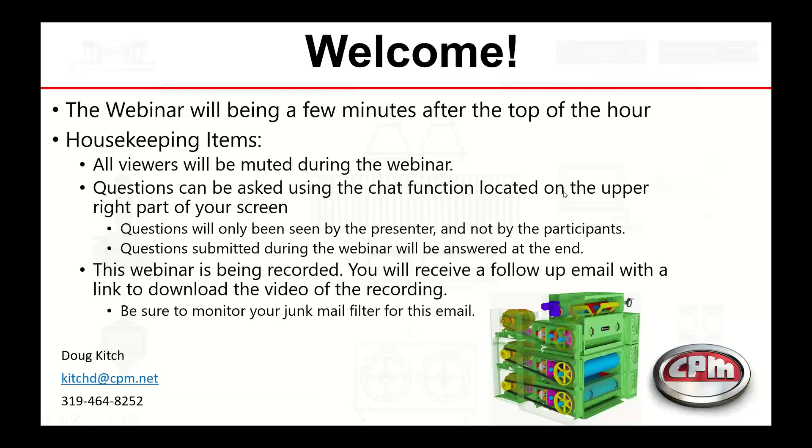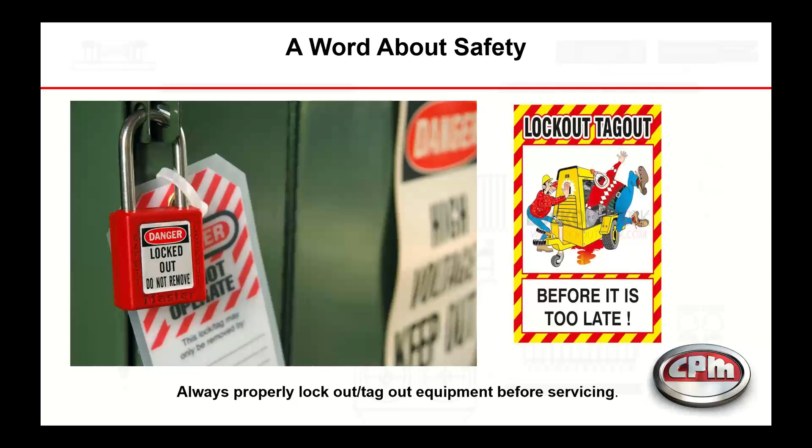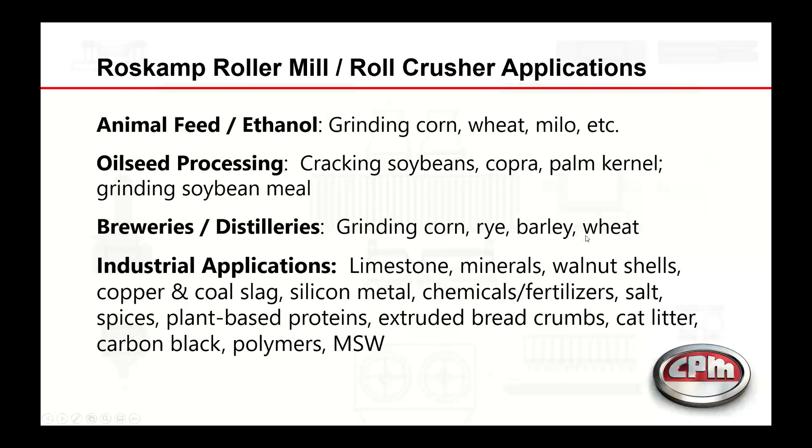Depending on the products you're running - this is a little more focused on the grain side - but usually we see less heating. We're not adding as much heat just because we don't have as much friction working as compared to a hammer mill or a pulverizer or something like that. And again, very application dependent, but because we aren't heating as much, we're also not going to lose as much moisture. So for those of you on the call that are more in the feed industry, that's less shrink that you're looking at there.

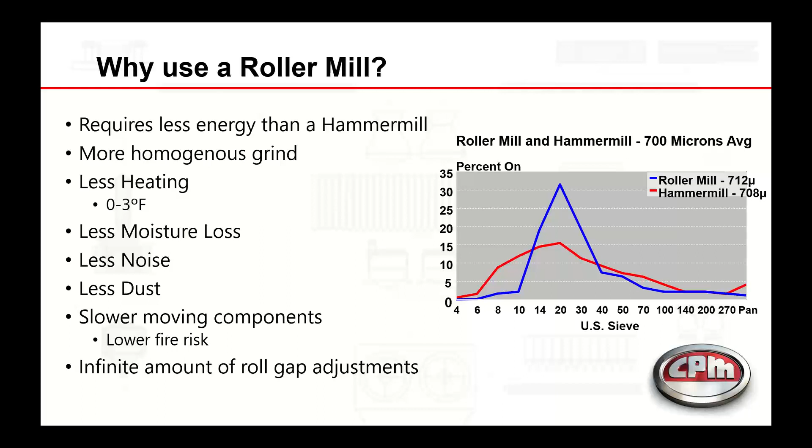So then we've decided that the roller mill is the best option. Now we look at how does a roller mill work? Well, material is fed through a series of rolls, typically 1 to 3 pairs of rolls, in order to try to reduce the size. And that's how roller mills work.

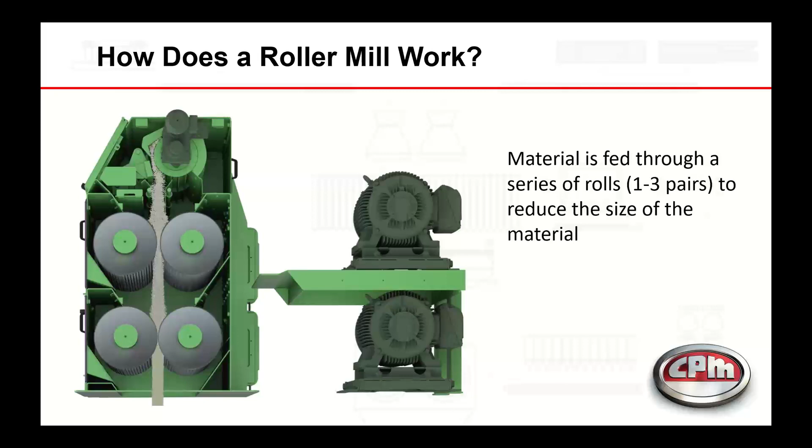I appreciate everyone stopping out today. I'm sorry, that was a poor joke. I apologize.

So let's start at the top of the machine with your feeder and what its function is and the different forms of feeders. This is our pocket feeder. Many of you have this particular feeder, and what this feeder is doing is it's volumetric. So we are able to calculate the amount of volume that we have going through that feeder. You can see the pockets are right here. This is actually showing our high volume feeder. And then it's going to dump across the face of this magnet, which is shown right here, and down into the rolls.

This particular feeder is very nice because it is volumetric. You are able to calculate how much material is going through your machine. And also you can tie it right into the main motor amps, and you can speed up or slow down that feeder as needed, depending on what your motor load is. And it is also a positive shut off, because if you need to turn it off, you can simply turn off the motor and you will not be feeding any product into your machine.

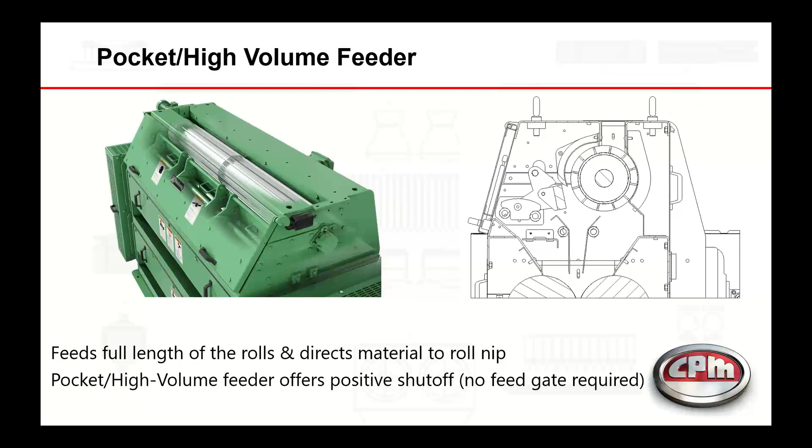So we'll move on next to, oops, too far, into our roll feeder. Now the roll feeder is similar to the pocket feeder in that there's a spinning rotor inside the feeder housing. But this is a very coarsely corrugated roll that you can see right here along this whole length. It runs the full length of the machine. And it utilizes a feed gate that opens and closes to allow more or less product through. So this roll feeder typically stays at a constant speed.

This is a very nice feeder in the fact that it does create a very nice curtain of material that goes down through your rolls. So we see very little surging from a feeder like this. Whereas with a pocket feeder, it's possible that you'll see some surging. You'll see your amps bounce up and down, and I'll touch a little later on why that could cause a little bit of issues. So the roll feeder is very nice in that regard.

However, it does require this feed gate, which does have to adjust open or close depending on what rate you want to be running. Standard, it's going to come with this hand wheel you can see down here. That's going to pivot this arm, which will open or close this feed gate away from the roll to increase or reduce the amount of material that is going through the machine.

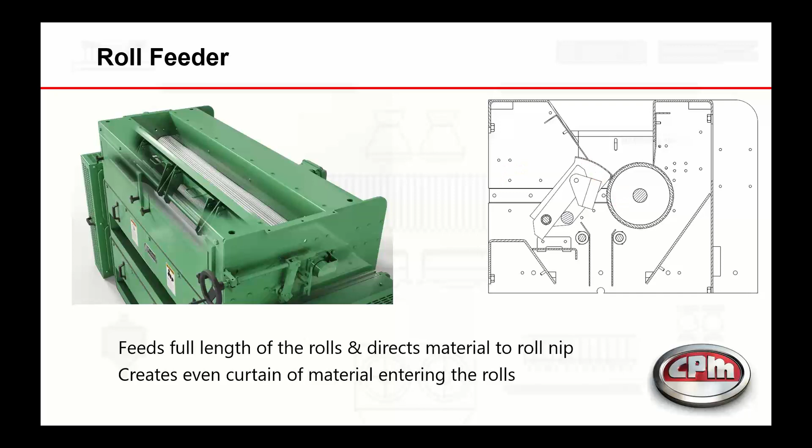Now, if you don't want that manual input, there is an option to add a linear actuator onto that. And this particular option utilizes a 4 to 20 milliamp signal, which you can again tie right into your controls and automation, so you can read your main motor amps to open or close depending on what kind of amp load you're trying to run on your machine. So that way there's a little less human input. You don't have to constantly be adjusting it instead of picking one set point.

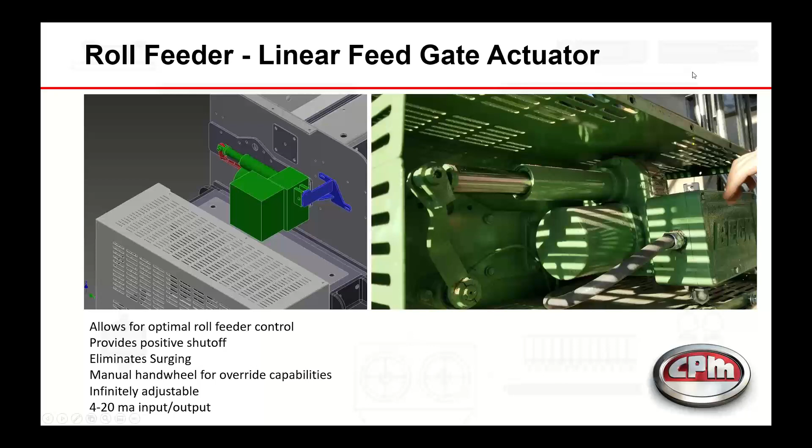Sorry, I have to remove the laser every time I want to change slides.

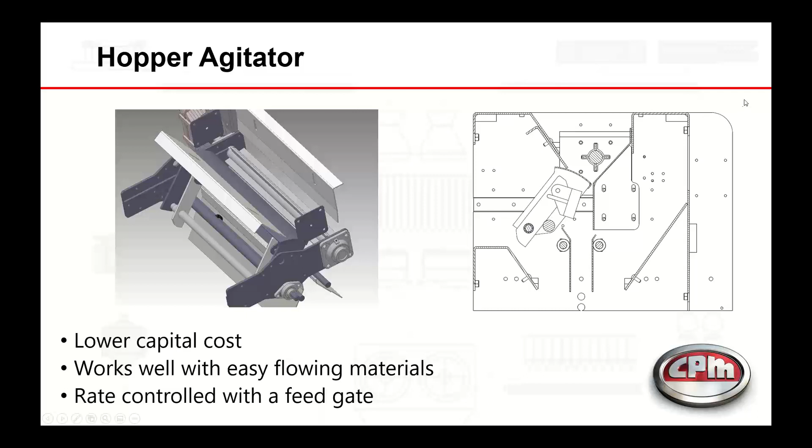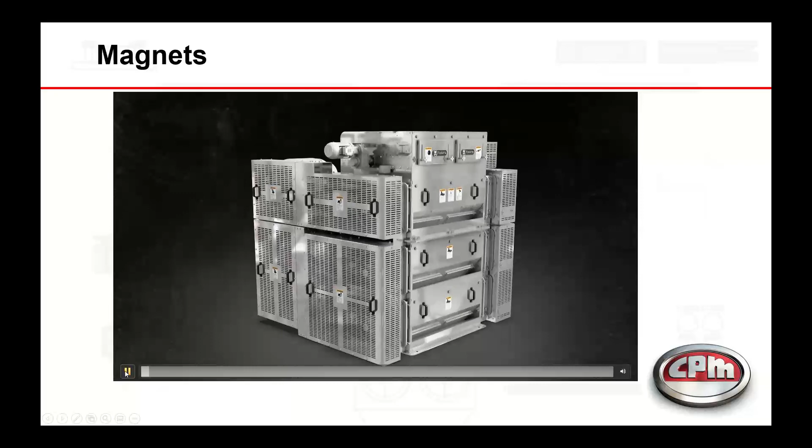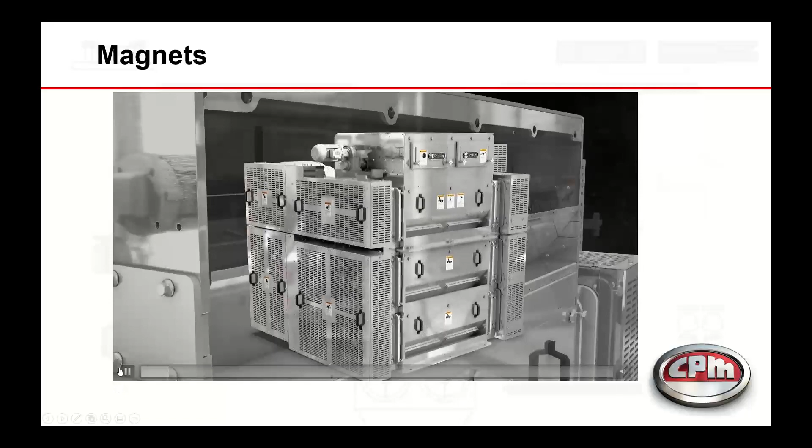Now let's talk about magnets, because hopefully every one of your machines that you're running does have a magnet still installed up within the feeder housing. Just going to play this video. Hopefully you guys all know how these work and you're cleaning them, but you can see that they're swinging away from whatever type of feeder you have in there. I'll play it pretty quick, I'll play it again. I'm going to pause it. So you can see it swings out. Oh, I didn't even get to pause it in time. I apologize.

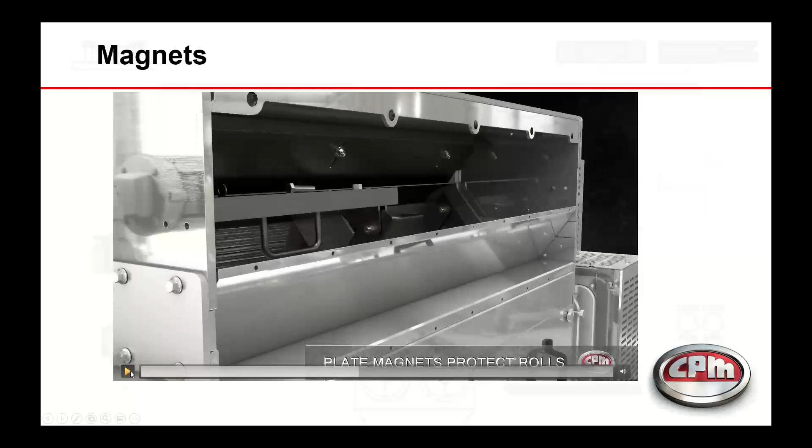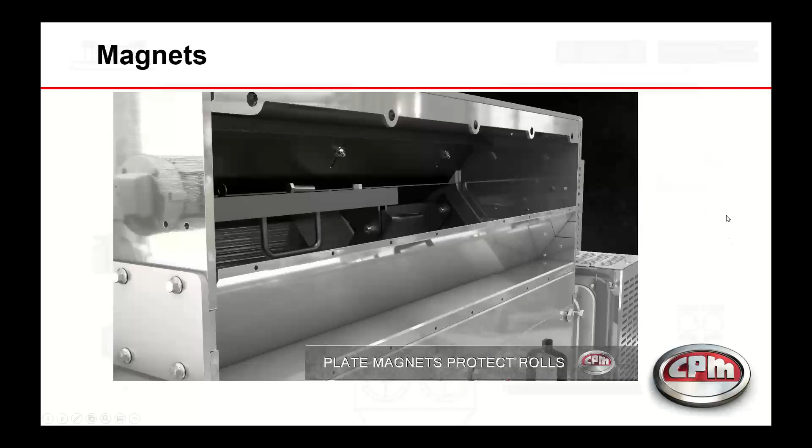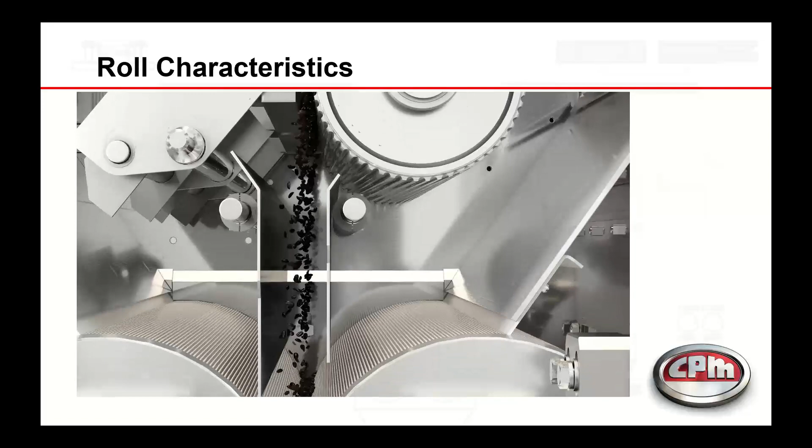So when that feeder swings out, just make sure you guys are cleaning it off frequently. I know sometimes they're overlooked, you forget to do them, but clean these off, making sure you're not getting any tramp material into your rolls and potentially ruining your rolls. So now that we've quickly gone through the feeder, we're just going to go down the line and see where our material goes next, which is into the roll. So let's start talking about some of the roll characteristics.

And first and foremost, we need to start off by trying to decide how many rolls we need to use for your application. As I mentioned earlier, usually it's 1, 2, or even 3 pairs of rolls. And why we need to decide that is, there's a little bit of overlap. There's times where a single pair will do it, or maybe the double pair. Either one will work, but what's best for your application? We have to take into account, obviously, capital cost. There's always that part of the investment we need to talk about. But it's also what's your best operating cost.

And I'm going to bring up the fact that, if you're looking between a 2-roll crusher and a 4-roll crusher, single and double pair, if both will do the job, when we look at the 4-roll as compared to the 2-roll, we're getting additional roll surface area. So we're spreading the work out over more pairs of rolls. So sometimes it's a little easier to get the grind we're looking for, and we can get a more homogeneous grind when we have a little more control over it.

If we look at how many pairs is too many, a lot of your machines out there, we can actually add another set of rolls to them. So if you have a single pair, we can make it a double pair. If it's a double pair, we can turn it into a triple pair, and a lot of times get you a little more efficiency, some better roll life. But as far as is there a limit, we tend to think the 3 pair is the max you should be running, just because as that material is going through your roll crusher, it is getting finer and finer after every single set of rolls it goes through.

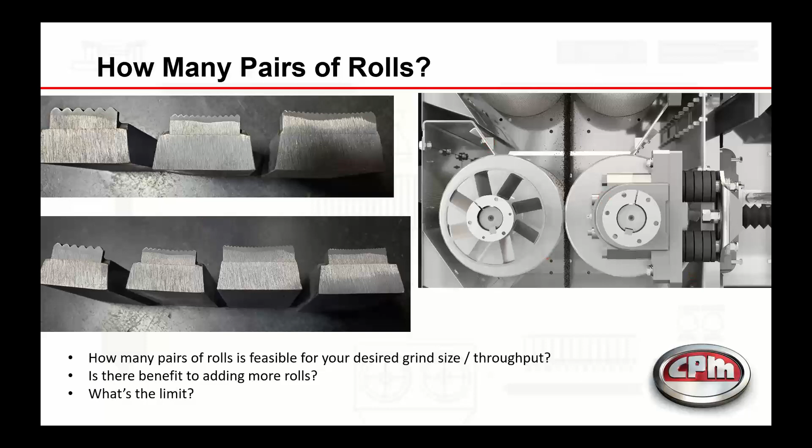There we go. So now let's quickly talk on how all those rolls are driven. In the examples I'm showing here on the far left, you can see we have one of our triple pair roller mills, and you can see 3 main drive motors. Each of those motors is driving the front roll on each machine, or what we call the fast roll. And then over here on the right side is our inter roll drive, or the IRD, as you may have heard.

Actually, let's just go to the example on the bottom. You can see our main motor back here. We have main drive belts going to this front roll, or the fast roll. And then over here on the right side of the machine is our IRD side, which is shown up here in the upper right. So the back roll is driven off the front roll via belts and different size sheaves. And we'll talk in just a second on what these different size sheaves are doing and what they're used for.

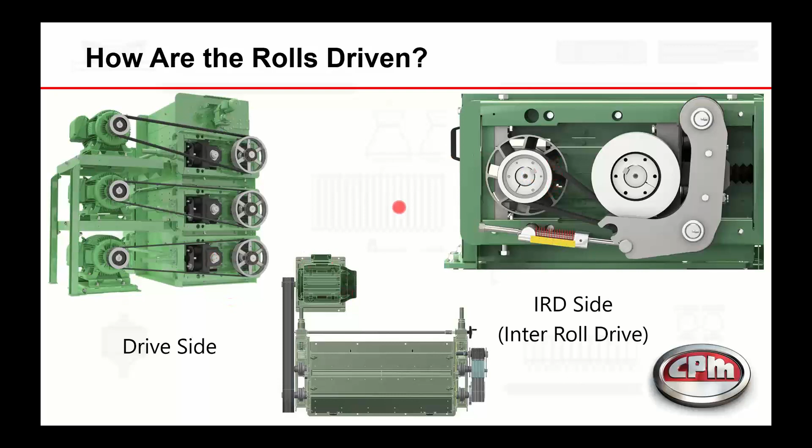So the reason that we like to use one motor per bank of rolls, or sometimes there's 2, but we only drive them off the front rolls, is because we want to make sure we understand how much work we're doing on each set of rolls, because that's really crucial to how your material is going to grind, how uniform of a grind you're getting, and also how much wear you're getting on your rolls as well.

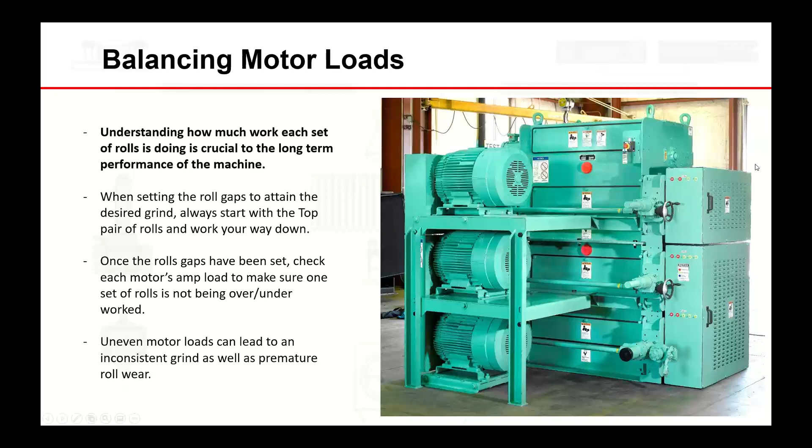And the reason for that is, like I said, it's product uniformity. We don't want to overgrind on one set of rolls as compared to the other. When you overgrind on one pair, you tend to create a lot of fines, more fines than if we were to spread the load out over a couple sets of rolls. And also, when you're overgrinding on one pair, you're going to wear those corrugations a lot faster than the other set of corrugations. And ideally, we'd like to wear those at the same rate.

So it's just for the longevity of your machine. It's a lot better if you can really maintain and balance out the work over all the sets of rolls that you have. Similar to the vehicles you drive, you have 4 tires on them. You want to wear those at the same speed, so you should be driving on all 4 tires.

So to talk about the differential, I mentioned it just a few slides back, and I've actually seen a question has already come in about this. Typically we're going to use a differential on our rolls. What that does is it changes the speeds of the front and the back roll so that they're not spinning at the same speed. And that actually creates a little bit of a shearing action in there. So think of it as you're cutting the material instead of just smashing it together or compressing it.

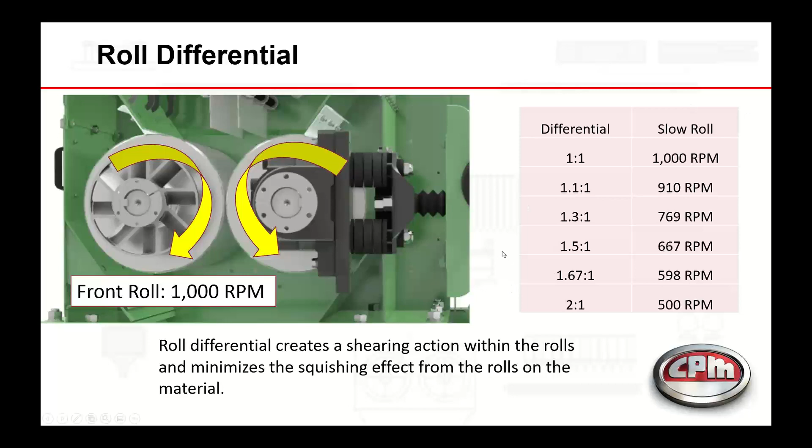Now we just talked about how the rolls are working and the material going through them. These devices, everyone has them on your machines, and I want to make sure we're utilizing them, because without them we have the potential to have material actually going around the rolls. So we want to make sure all the material goes through the rolls.

Up top you can see there's a UHMW cheek plate. It's this piece right here. It's UHMW, and you can see it's slotted, so it's adjustable, because as your rolls wear you will lose diameter, and we want to make sure this contours to the roll. So what this piece is doing is preventing material from going around the ends of the roll.

Now right here you'll see another plate. You can see it on each side. This plate is also adjustable. There's one bolt here, and there's another one you can barely see here, but you can loosen those bolts and this plate will actually slide up and down. What this does as well is prevent material from bouncing over the rolls, because again we want all the material we're grinding to go through the rolls instead of over.

So making sure these are set, I see it quite frequently when I'm out in the field. These were lifted up when you change the rolls, and they never drop back into place. So what happens is you get a lot of material that's going over the rolls. We want to prevent that.

One of the easiest ways I do it is, if you can just use a flathead screwdriver, put it between the rolls and that plate and drop it down. The higher up you are on your machine, it's not as crucial, but certainly as you get down and you're getting finer, you want to have a tighter and tighter clearance on that plate seal.

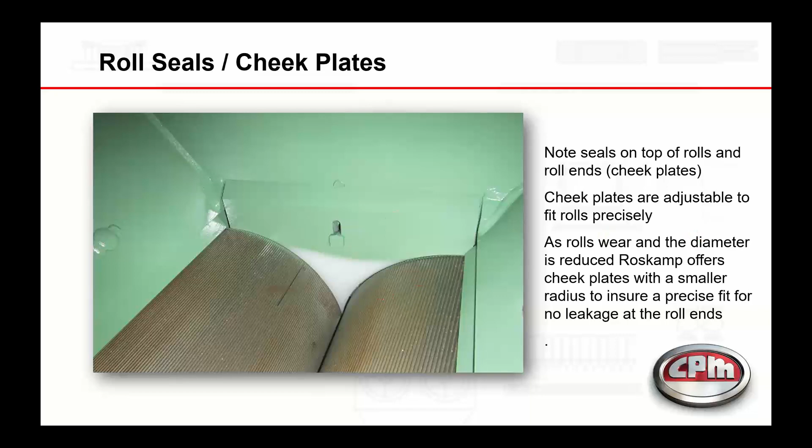Now let's talk a little bit about the roll diameters and what the options are and some of the advantages. For the most part, larger diameter is better — there's more advantages the larger you go. I'm going to talk about three main bullet points. On the left is a list of the different diameters of rolls we have available in particular machines. A couple of these we don't actually offer new anymore, but there's a good chance many of you are still running them in the field today.

The first one is the nip angle, and that is basically what is grabbing that material and pulling it down through the rolls. Yes, the corrugations are grabbing a little bit, but it's also the angle at which that roll is able to contact the material. The larger the roll is, the more optimal that nip angle is.

I use the example shown down there: a Ram truck and a golf cart. If you have to use one or the other to jump over a curb, that truck's going to be able to do it better because it has a larger diameter wheel compared to that golf cart.

Just because I'm sure a couple of you were joking about me using a Ram — I did have a coworker suggest that I use an F-150 here, but I told them I could not. I did not have enough room where that golf cart is sitting, so I couldn't use that as an example.

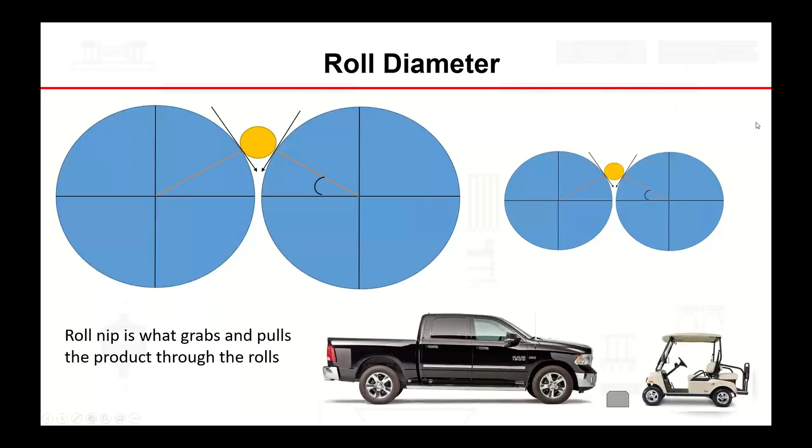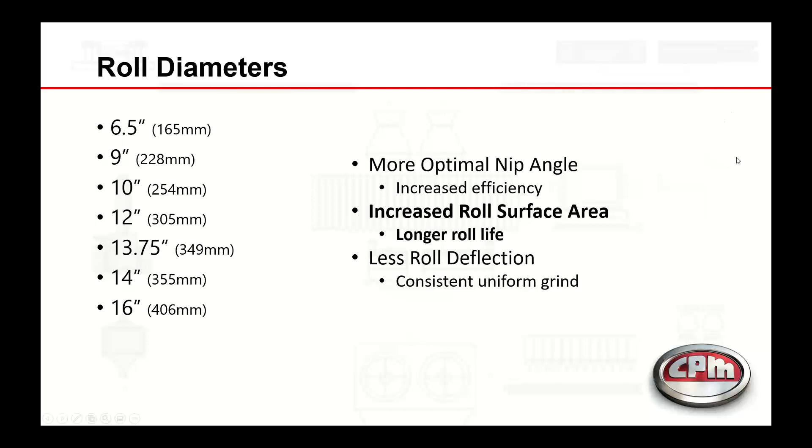So now to talk a little bit about increased surface area. When you go to a larger diameter, you have more surface area on that roll as well, and what that's going to do is give you longer roll life. The corrugations are still wearing at the same rate, but because you have more corrugations, they're going to last longer in between the times you need to corrugate. I give three examples here, showing three different 36-inch wide rolls.

So we have a 9-inch, a 12-inch, and a 16-inch diameter roll. That 9x36 has just over 1,000 square inches of roll area. The 12x36 has about 1,357 square inches, and the 16x36 has just over 1,800 square inches.

So each of those is about a 33% increase as you go up. You have the same width of machine, and theoretically you can move the same amount of volume through that, ignoring the efficiencies with the larger roll diameters. But if you have 33% more roll area, we would expect you to get 33% more life out of those rolls before you need to recorrugate them.

So that leads directly into what's your downtime. If you could remove one less corrugation and one less time you have to turn off that machine and shut your production down, what's that worth to you? So just something to keep in mind when you're looking at machines, and is there a potential there for some savings?

I'll add, some of your machines can be retrofitted. We can convert a 12-inch machine to 13 3/4-inch diameter. And those of you running a 14-inch, we can also increase that to a 16-inch roll utilizing the same frame. There's just a few components we need to change on your sheaves and belts, but there could be a possibility we can increase the diameter of your rolls without changing anything else on your machine.

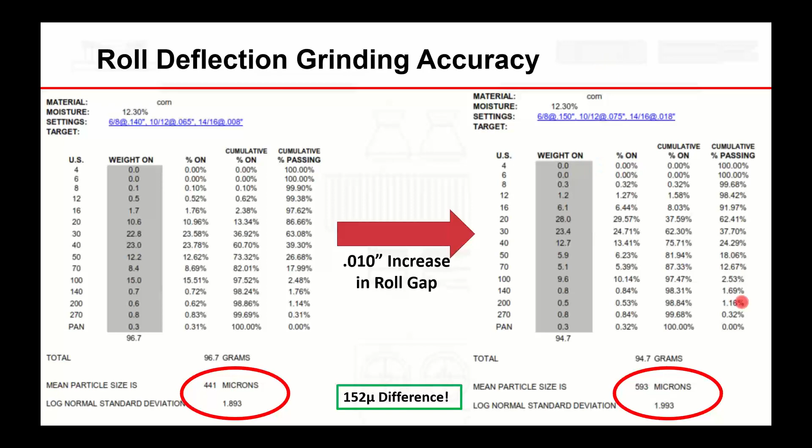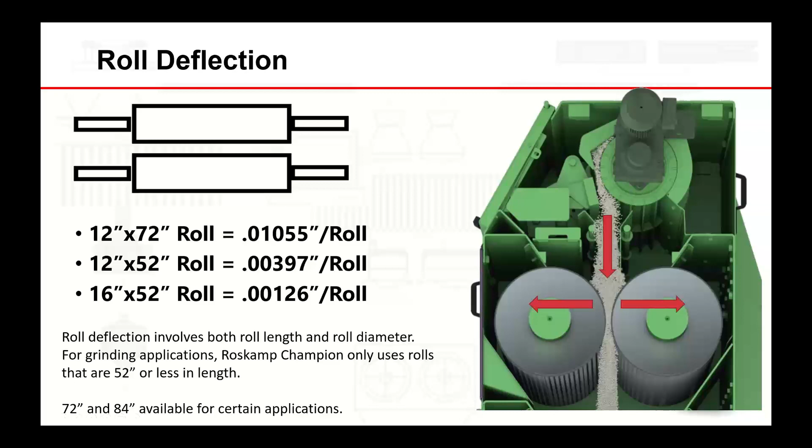Now, if you go back and think about that 152 micron difference - if we have a roll that can flex that much, you could be making a different grind even though your roll gap's the same. As that roll is flexing, you're going to see your grind change. That's why we don't like to use a machine wider than 52 inches for a grinding application, because when you're 52 inches or narrower, that deflection number really drops down, and we're able to keep a much more homogeneous grind for a longer term.

So let's talk about this now - we're obviously trying to keep a homogeneous grind, and we can see some roll deflection and what happens. So how is your machine keeping those rolls together? How are we maintaining that consistent grind?

Just a real quick trivia question, because we can - any guesses on what the weight of a triple pair 1652 roller mill or roll crusher is? And that's not including the motors. You guys are all muted, so you can't answer anyway.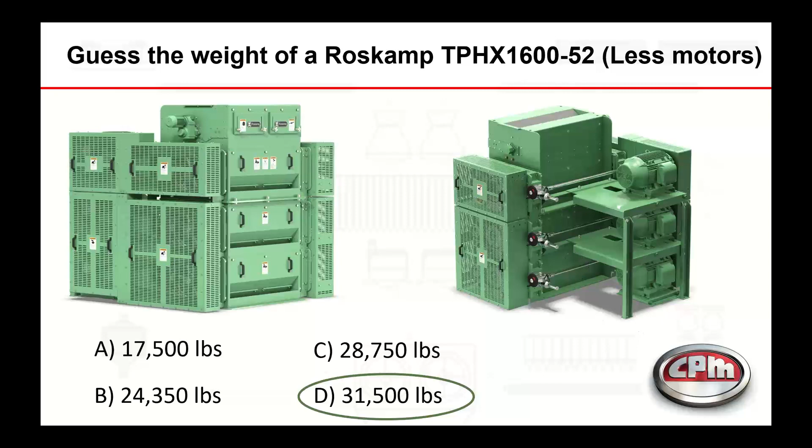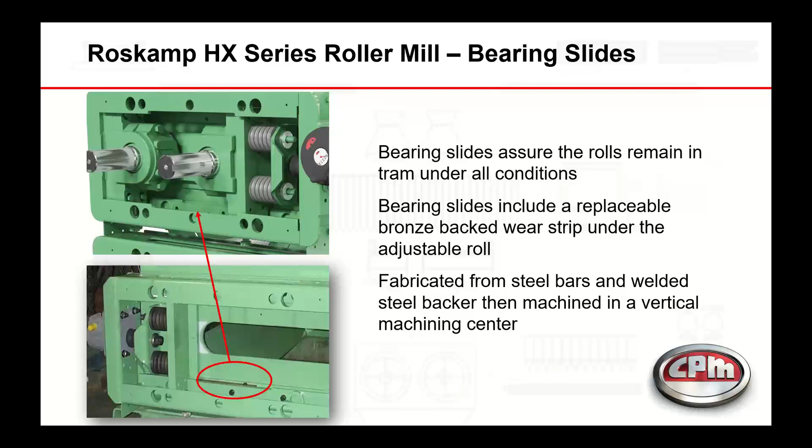Also on that machine, just to point out, the frame is the only piece on your machine that cannot be replaced by the time that would wear out - we just assume you'd need a new machine at that point. There is a piece on the frame that is replaceable though. I just want to point this out real quick - it's that bronze bearing slide. As that slow roll is moving in and out, there's a sliding surface, which is that bronze wear strip. That is replaceable, so that's just what I want to show on this slide.

But the frame only is supporting the weight of the rolls, so we need another enclosure that is holding together the separating forces. As those rolls are trying to push out, we need something to contain that pressure as well. So what you guys have on your machines are these tension members, this whole tension member housing.

The way this particular area works - this machine is showing a 5-ton ball screw jack, which is what's going to move your rolls in and out. It's going to hold your rolls in. You can see our bearings up on this tension member, and then we have this tension member over here that's holding this side. Now on these rolls, you can see we have a disc spring, and on the next slide I'll show you some examples of those.

That's what's going to hold those rolls in. If you do get an uncrushable object—I won't say rocks, because some of you on this call are grinding rocks, but bolts or something like that—if we need to pop those rolls open, that's what those springs will do. But what I wanted to show here is that it's this tension member affixed to your frame that's actually supporting the separating forces when you're grinding.

So we have two different areas on that machine: the frame, which only holds the weight of your rolls, and this tension member enclosure, which is what's actually holding your rolls together to keep them from trying to move apart on us.

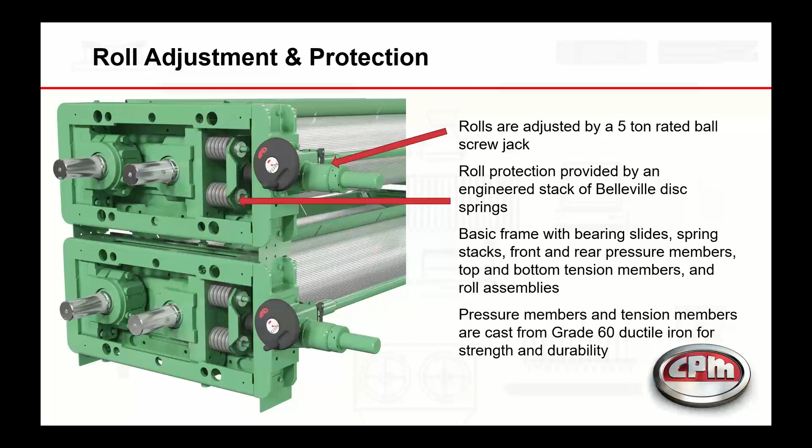So the springs I just talked about, depending on the series of machine you're running, are going to look a little different. You can see up here on the top left, this is our 650 series, a much smaller machine, so we don't have a very high intensity spring going on. But as our machine sizes get bigger, our spring stacks get more and more robust. You get up to the 1200 and 1600 series shown down here on the bottom, and you can see there's a double stack of Belleville disc springs we're using there.

Just like I said, if an uncrushable object does come into your machine—hopefully it doesn't—that will allow those rolls to pop open and hopefully allow that product to get through.

There are a few different options we use when looking at these spring stacks, and it depends on your application. Like I said, there are people on here grinding rocks, and there are some people grinding very simple stuff, such as corn or other grains.

So we'll put a preload on those springs—that's what's holding those rolls together. We also have different deflection forces and over-travel to look at, so we can move anywhere from 4/10 of an inch up to a little over an inch, depending on your application. I'm going to keep it a little vague here since we have such a wide array of people on the call today.

Basically, what I'm getting at is there are different options depending on what you're looking at. If your grind changes and you're starting to get a much finer grind, we want to make sure we're keeping those rolls as tight as possible, so we may look at an alternative spring stack to keep those rolls from moving as much as possible.

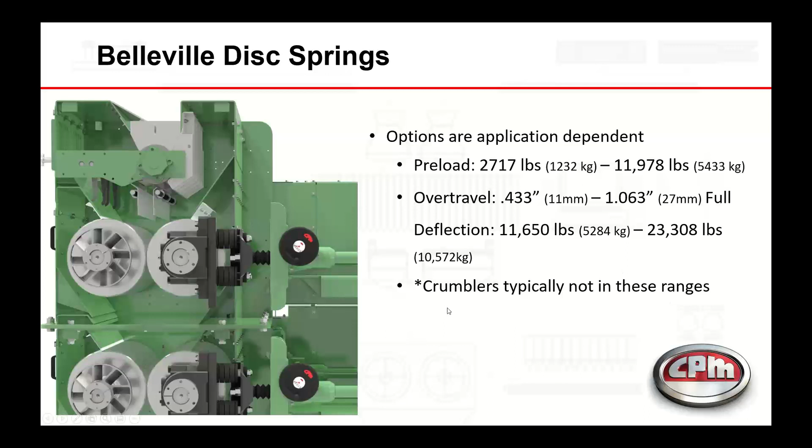Now we're going to move on to the roll adjust. We just talked about how we want to try to keep those rolls from moving—we want to keep them in the same place. Once we get them where we want them, we want to make sure we can move them in unison. So we have the single point roll adjust: you only have to move one hand wheel per bank of rolls, and that roll will stay together and move in unison on both sides.

Because once we get parallel, we want to keep parallel, especially as you get to a wider and wider machine, keeping that parallel can become very difficult. That example I gave earlier on our 12 by 12 machine—that's not very hard to keep parallel because it's so narrow. But as you get to that 52, 72, 84, it becomes more and more imperative to keep an eye on them.

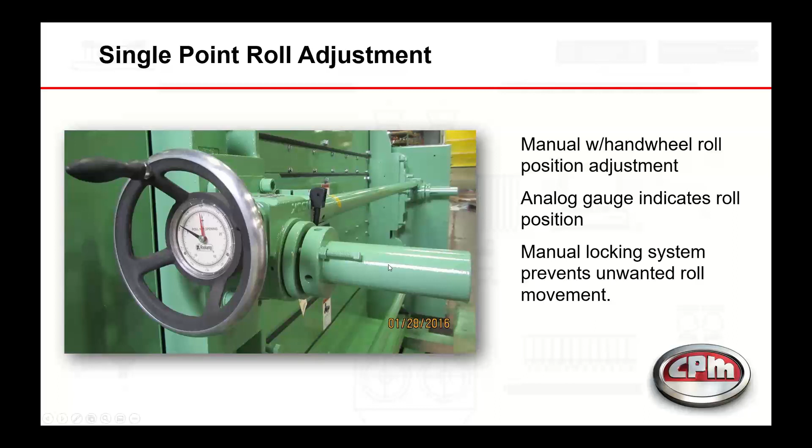So we have the single point roll adjust, but as you're checking it, you may notice your rolls aren't in parallel. Luckily, we have a very simple way to correct that. If you're on our 1200 or 1600 series, there's this coupling on the back connecting those jacks together—hopefully you're all familiar with it. All you have to do is slide this coupling over, and you can move either side independently to get the rolls into a parallel position.

And you reconnect that coupling, and you can continue to move that roll as you were before. For those of you operating our 900 or 650, as you're aware, it's not that simple. I apologize, I actually omitted those slides from here, but you can certainly still do it. You have those threaded rods on each side, but for the 1200 and 1600 series, this is how we maintain our parallel.

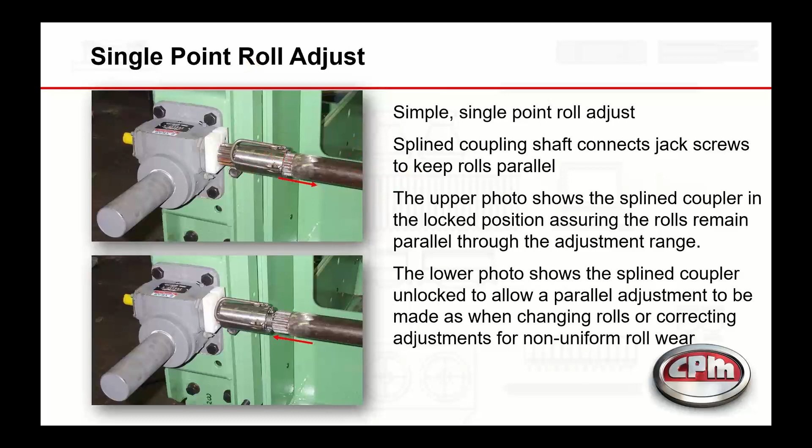Now, all of your machines do have roll stops, which is what we use to prevent you from running your rolls together. Unfortunately, when you have to have a very tight clearance, if we're down to 2 to 3 thousandths of an inch, there's also the possibility they can run the rolls together. We don't want you to do that, because that's going to wear your corrugations faster and increase your operating costs, which we don't want to do. So these roll stops are designed so we can set them to prevent your rolls from running together.

Again, I'm showing our 1200 and 1600 series here. The 900s and 650s are a little different. Certainly be happy to always work with you guys and walk you through how to set them. Each application we're going to set them a little differently. So if this is something you're not familiar with, please feel free to reach out, and we're happy to walk you through it. I don't want to wear your rolls any faster than we have to, so making sure these are set is a very easy thing to do, especially if we're on site with you guys.

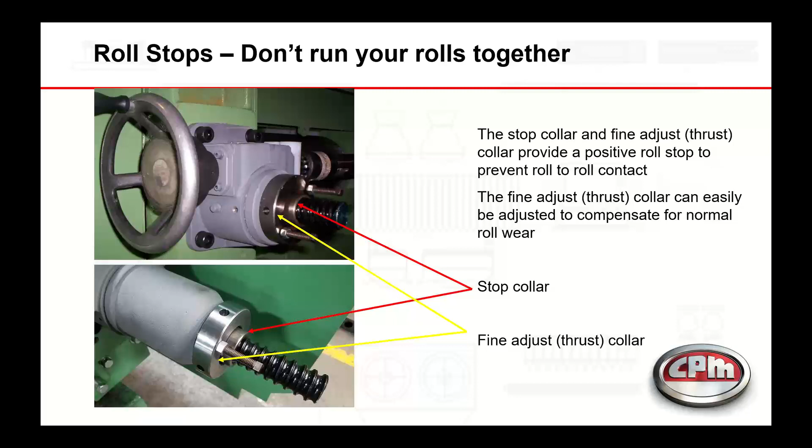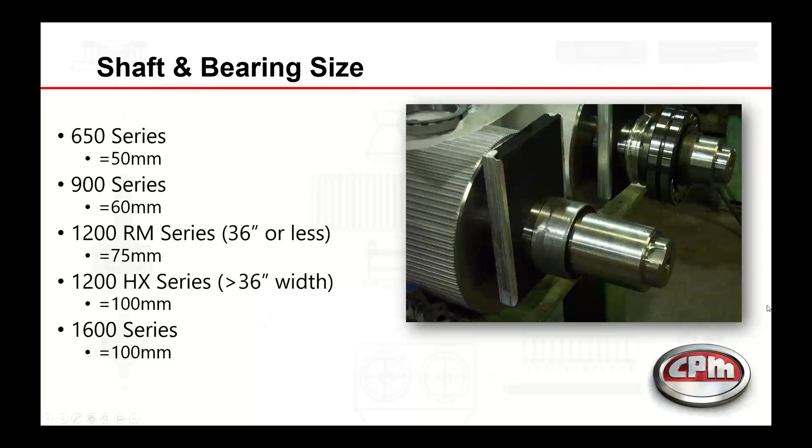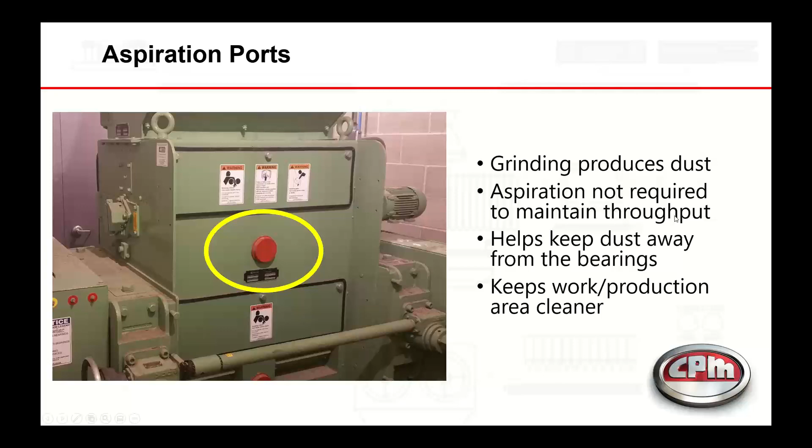Now, all of your machines did come standard with an aspiration port on them. Many of you that have older machines, if you haven't purchased your machine within the last 5 years, your aspiration port's going to look like this - that round, I think it's a 4-inch diameter connection point on the back of your machines. We don't require aspiration to maintain throughput through your machine, kind of like a hammer mill would, but we do like that just for housekeeping purposes, and even to help protect your bearings a little bit. I'll talk about that in a couple slides.

But the newer machines that you'll see out there actually do have a full width air pickup point. We did that to help keep the velocity a little lower, because with that round 4-inch diameter one, depending on how much aspiration you were pulling, you got a pretty high velocity at that pickup point, and we'd pull a little more good product than we wanted to. So we want this full width pickup point. Sorry, I realized my laser's not on - here we go. So we do have one for each bank of rolls.

So you can be pulling a lot of aspiration here from the bottom, but you won't be able to collect any of the dust that you're actually producing up on the top of the machine. So if you do want to put a little negative air on it, I do strongly encourage that you put them on every bank of roll, just because that's where you're producing the dust. That's where we're going to try to collect the dust.

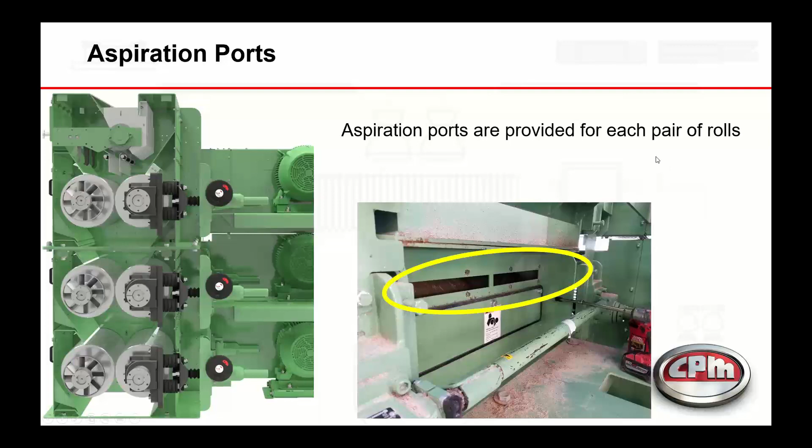So the places that dust could get out through the machine would be where your roll shafts are exiting the machine. So we do have roll seals that you can see here mounted to the shafts. That's just a neoprene seal that's going to hold tight against the frame of your machine to help prevent dust from getting out.

Then we get into the split housing pillow block bearings we use. We now make them with an LOR seal to get that O-ring in there. The goal is just to try to prevent as much dust as possible from getting into those bearings. Those bearings are designed to last the life of your roll.

So if you're not seeing that or having issues, an easy way to potentially increase bearing life would be to put a little bit of negative air on that machine, just to try to prevent a little more dust from getting into those bearings.

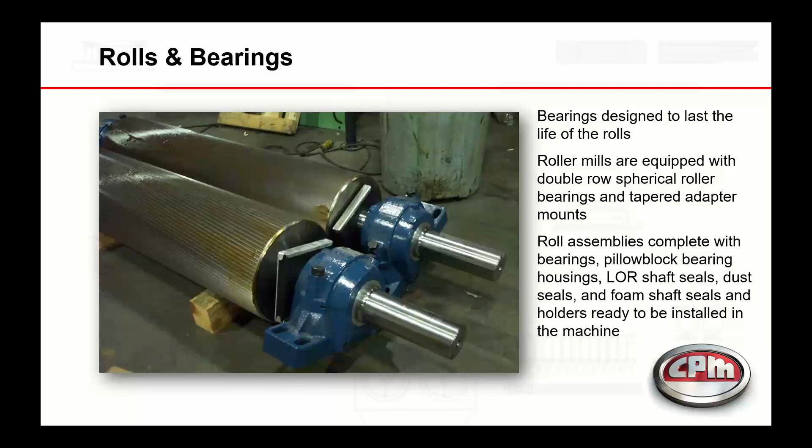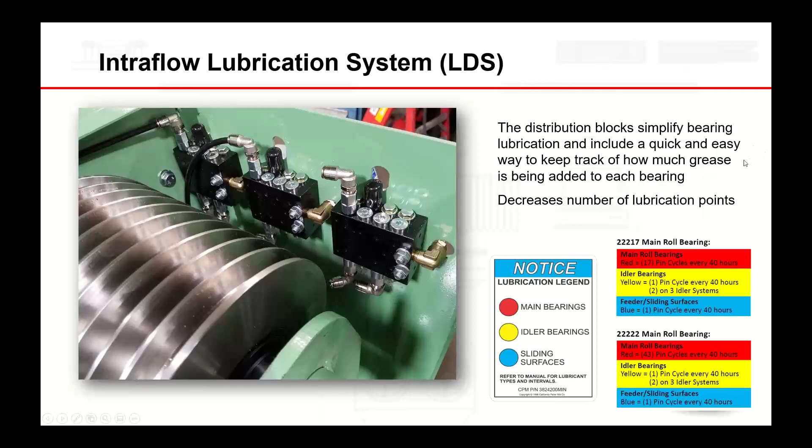So also with maintaining those bearings, a lot of our newer machines are being equipped with this lubrication delivery system, or LDS as we call it. That way it's just a single lubrication point on your machine, again trying to reduce manual points where you have to be adding grease. So we put it all in the same spot, that's really what this is. I'm not going to get into a lot of detail, but most of your machines should have something like this on them.

Now to talk a little bit about corrugations. I've seen a couple questions have already come in about the different corrugations and what's required. The corrugations are very dependent on the application you're grinding and how fine you're wanting to grind. So we're always happy to review them.

One thing I really discourage you from doing is, when you send your rolls in for recorrugation, we hear a lot of "just give me what we've done before," just because that's what we've always done. For most of you, I'm guessing your grind requirements have changed over the years and decades. So review and make sure we are using the right one.

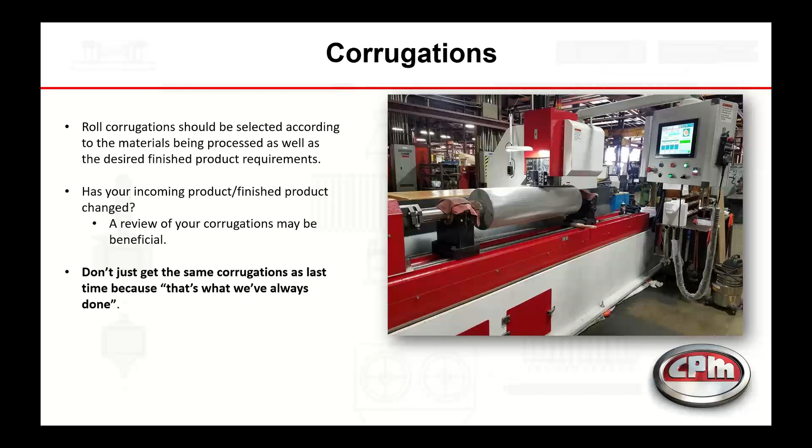And just real quickly, a quick guide on some of the more popular corrugations we use: the Sawtooth, the B&W, and the RBV you can see here. B&W, I know, is many times also known as Buehler Cut. I obviously can't write that on our slide, but I will acknowledge that yes, that's what it is referred to at times. I won't read through the bullet points.

The B&W is very similar to the Sawtooth; we see a little sharper edge to it that lasts a little bit longer, which is the benefit. And then our RBV is the most common corrugation we use for the majority of our grain grinding.

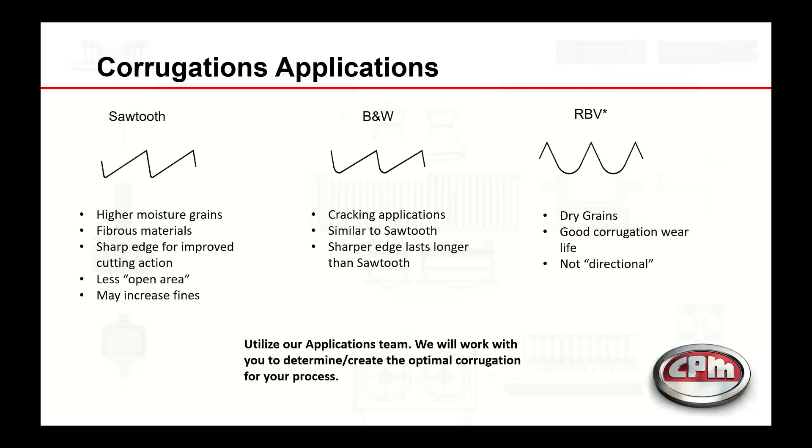So similar to the last slide, feel free to utilize our applications team. Just because the corrugation you're using has worked pretty well for however many years or decades you've been operating your machine doesn't mean there may not be a better mousetrap out there, or if your grinds change a little bit or you're trying to optimize something else, feel free to have the conversation with us. That's what we're here for. We do want to make sure we let you know the options we have available.

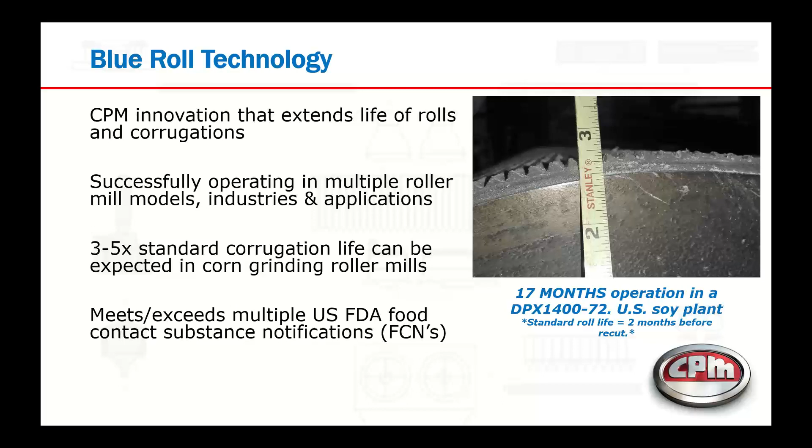And one example of that is the blue rolls we've been working on for a handful of years now. A lot of times we have ideas that you may not have heard of or may not know exist, so we're happy to let you know what we know. This is just one example. If it's something you feel you may be interested in or benefit from, feel free to reach out to us. I'd rather not make this much of a sales pitch, so I'm not going to dig too deep into it, but it is an option available for you guys.

So just quickly review a lot of the points we've went over, and then we'll open it up for questions. Just the different points we've talked about and where they're at on your machine. I do show one of our triple pair machines here, so many of you may not, if you only have a single or double, obviously you could reduce it.

This won't show the 900 series or 650, but you can see our 3 main drive motors, one for each set of rolls. You can see your jacks on the back of the machine. There's one on each side, so you can see these 3. There are 3 more on the other side that we can't see from this angle. You can see our disc springs that we were talking about, so that jack's moving that whole shaft in and out as it's moving the bearing and roll, I should say. Obviously, you can see the bearings on all the ends of the shafts.

We did talk earlier about roll parallel and maintaining that. Another one is actually the roll tram. We didn't talk about that one at all. So that's kind of how your rolls, if they get cocked a little bit like that. Underneath these bearings here is actually a tram bolt that we can use to lift up or lower that roll, so we can make sure they are in proper tram. As these machines are sent out, we do send a tram gauge with all of them. Many times they do get lost, understandably so. But that is a tool that is sent out with them.

You can see this cheek plate in here. We talked about that, sealing the end of the roll. It's hard to see those plate seals we talked about. You guys all have the sample ports on your doors, and then the swing out magnets and the feed gate we talked about earlier. And then we'll just go to one more on the back side, and then we can open it up to some questions.

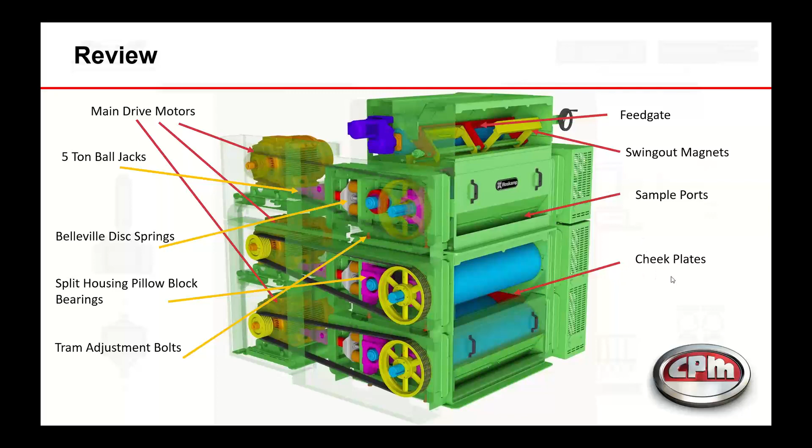There's the back side of the machine. So again, you can see all your main drive motors for each one. Here's the jack on the opposite side that we couldn't see. You can see that shaft that goes across from jack to jack that does connect those together. And there's that coupling component that you can couple or decouple if you do need to reset your parallel on your machine. The single point roll adjust on each machine, and each machine is independent, so you can move each roll independently.

Main drive is obviously over here, and then here's that IRD or inter-roll drive side we talked about. For the most part, most of your machines are in this configuration, but they can be flipped if we do need to. And then again, those aspiration ports on each machine. You can see another one right in here. The bottom one's kind of hidden, but it is right there. So that's a real quick review on those points we talked about.

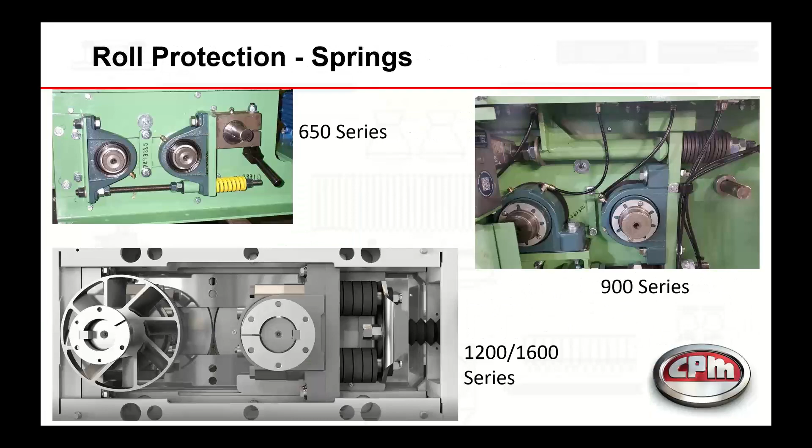Okay. Had a question that I'll tackle actually. Is the 12 by 12 machine available for purchase? Yes, it is. We've begun offering it commercially. The only model exists in our Waterloo, Iowa test center today. It is a fully modular machine. Each pair of rolls and the feeder is its own section. So it's a bit of a different design than what we have. Will, we can reach out to you individually to see if it fits your needs. Another question from Will. Do you offer a 4-inch shaft?

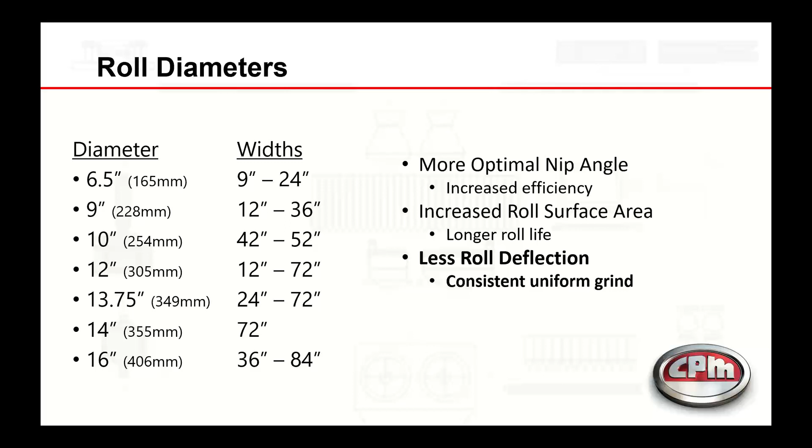I don't believe so, but I may have to confirm that. I don't know that one off the top of my head. We'll reach out to you and answer that question in greater detail.

So there's a couple steps to make sure we're not over grinding or under grinding. Turn your machine on, and with no load going through, record those idle amps. Then start running and grinding as you normally do, and record your operating amps. At that point, open the bottom set of rolls so you're not overloading them, while the top keeps grinding as it normally would. When you open the bottom rolls, you'll see your amp load drop.

That amount of amps you drop, that delta, shows how much work you're doing on the bottom pair. Compare that to your total operating amps, subtract out your idle amps and the amps lost by opening the bottom rolls, and that tells you how many amps you're pulling on the top set versus the bottom set. Hopefully those numbers are pretty close, so you can see how well you're balancing them. Hopefully that answers the question - it is a little confusing, and if not, feel free to reach out and we can help you figure it out.